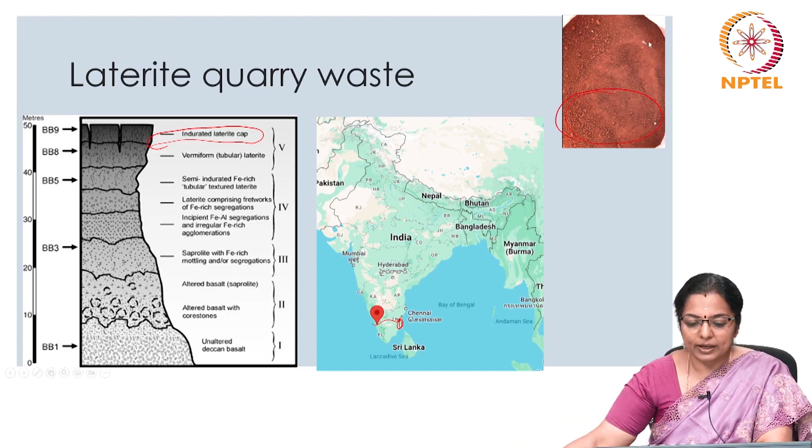If you look at the composition, laterite is naturally occurring and it is a reddish clayey material. It forms the topsoil, as we had seen in the previous slide, and it is also a subsoil in tropical regions. Now, this has been used widely as a building material, especially in vernacular architecture. It has taken various forms such as adobe bricks, and the soil has been used in traditional rammed walls and integrated techniques like wattle and daub houses, all of which we have seen in the previous few classes.

So, laterites from different locations behave differently because of variations in their sources, and therefore laterite found in Kerala will not be similar to that found in Tamil Nadu and vice versa. It varies even within a particular state because it is very region specific. Overall, a typical laterite has between 30 to 60% iron oxides, 20 to 40% aluminum oxides, and 5 to 20% silica. Hydroxides constitute 5 to 15%, and clay minerals form 5 to 15%.

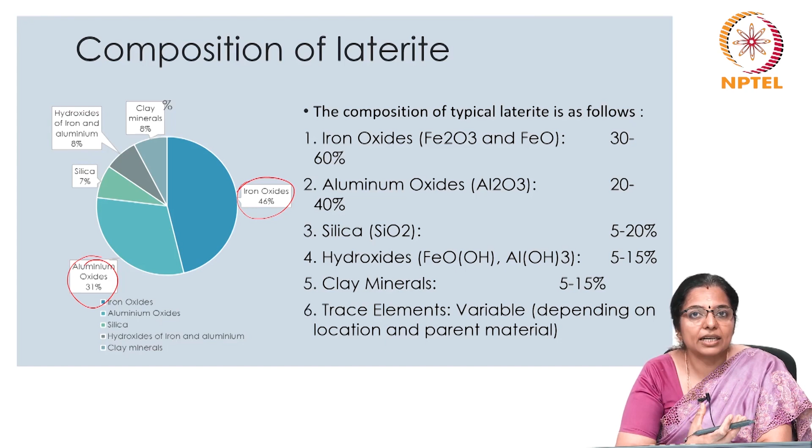There are certain trace elements. Now, the range of these oxides is very vast, and that is why laterite comes in different compositions, but the overall family is called the laterite family. So, depending on the composition of these various oxides, the quality of the laterite and its color would also vary. You have extremely reddish brown laterite, as well as dull colored laterite available.

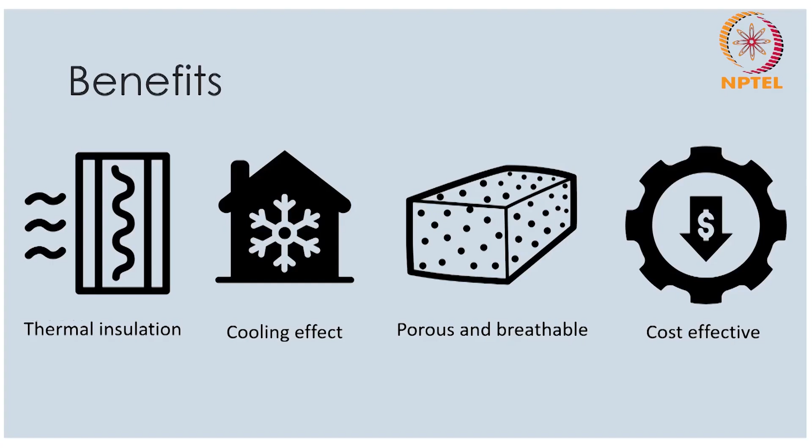Now, laterite blocks have certain benefits. It is a good thermal insulator, and it can easily adapt to different weather conditions. If you look at laterite as a block, laterite stone has very good thermal mass. Because of its thermal mass, it keeps the indoors very cool when the outside is very

hot. So, it is an ideal material for hot and dry regions, for arid climates, because the vice versa also happens. When the outside is very cold, the inside is very warm, and both happen because of its high thermal mass. So, laterite blocks have high thermal mass, because of which they keep the indoors comfortable in all extreme weather conditions.

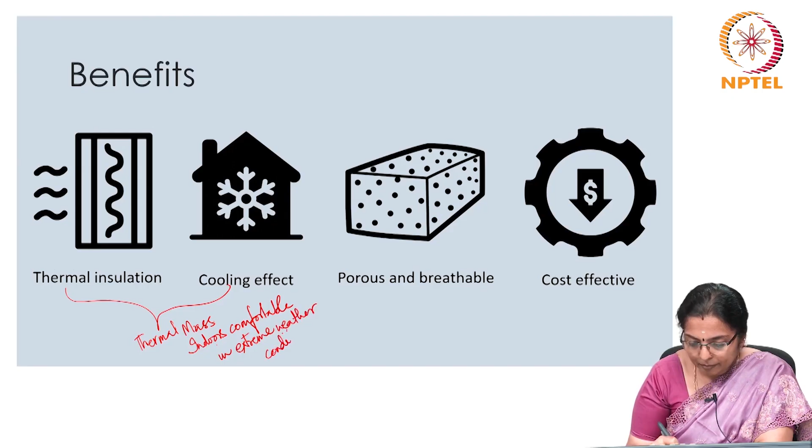That said, the laterite soil is coarse or rough, and it allows water and air to pass through it. That is, it has good porous properties, and it does not swell with water or anything like that. So, that is also a very important property, that it is porous and breathable, and therefore one should be very careful when they decide on the kind of mortar to be used.

If there is a possibility of water seeping in through the laterite soil, then it is best to have mortar or binders which are breathable, which are porous, which will allow the block to breathe. Only then the block will also dry itself automatically. If that is not done, then suppose there is a wall like this, external wall, and there is water seepage happening like this. Now, if you put a layer of cement or something like this to block the water, what will happen? The moisture will get retained here. You might as well facilitate this water to be absorbed, and it will also dry automatically.

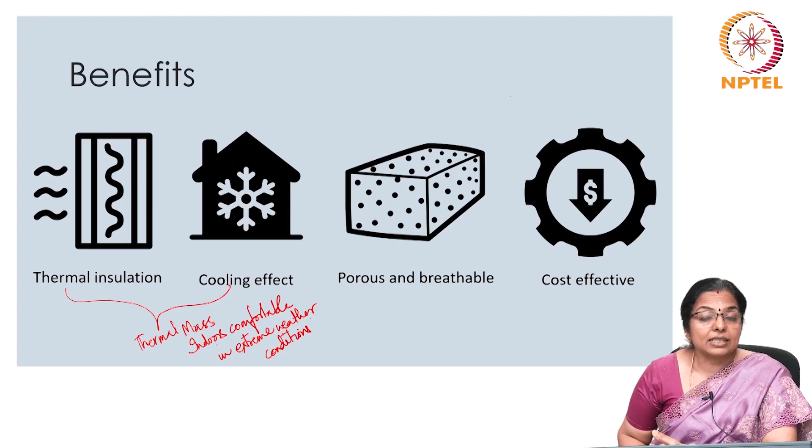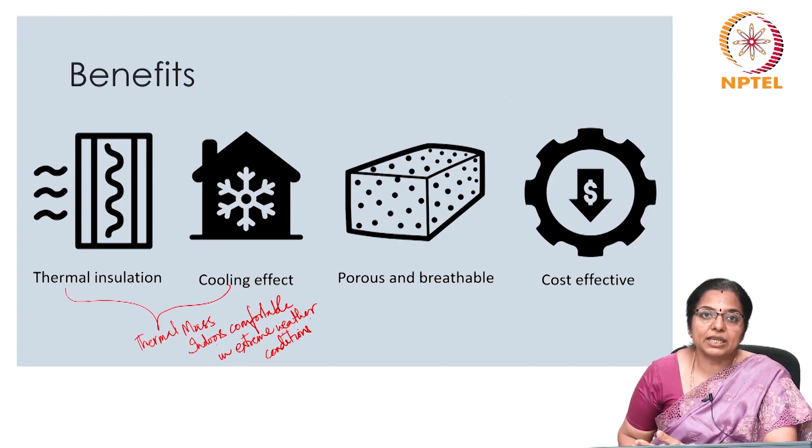Now, laterite is a very locally available material. When it is looked at as a locally available material, laterite can be very cost effective, if it is sourced locally. Otherwise, it can get very expensive, because laterite is a heavy material, especially if you are looking at laterite slabs. The slabs are extremely heavy; not only transportation cost, but the embodied energy of the block by virtue of transportation energy can rise very high.

Now, it is also found that a blend of laterite and quarry dust mix can be used to replace river sand, and the maximum compressive strength of say 1.67 newtons per millimeter square was observed in a 30:70 mix ratio of dust to laterite. So, when you use 70% laterite soil plus 30% quarry dust, it is found that this can be a replacement for river sand, and that makes it a very significant material considering the fact that river sand is in scarcity.

Also, by virtue of this replacement, the demand for natural river sand can be reduced, and this can help preserve the natural resources and reduce the environmental impact of sand mining. As you know, sand mining is a very rampant procedure, and it can lead to a lot of environmental degradation.

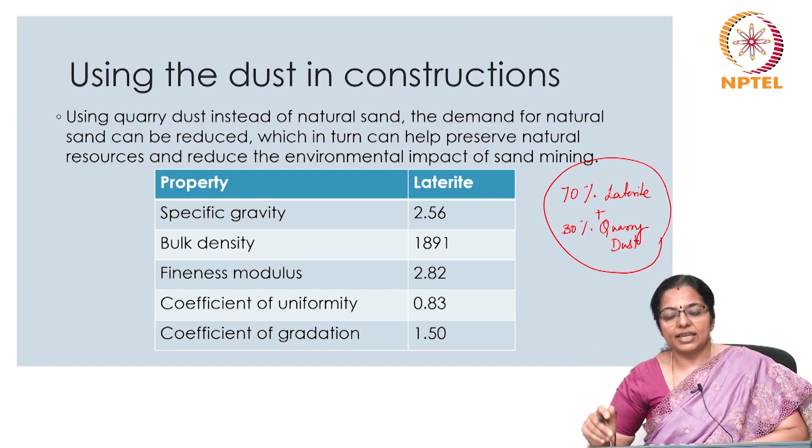Now, let us look at the applications of laterite soil as well as blocks. Laterite blocks can be cut into any sizes that you want. So, any size variation of the block is available, and large chunks of laterite stone can be fine cut to custom sizes. So, laterite blocks are used, and laterite soil can also be used. Laterite soil is primarily used in two areas. One is as a replacement for sand with a combination of quarry dust, and it is also used for plastering. When you use it for plastering, the building itself gets a reddish hue.

We will just see an application of laterite soil. In the Madhouse project, as it is called, laterite was experimented with, transitioning from simple renders to a Tyrolean technique. So, instead of using it only as a render or as a plaster, a specific technique was used with laterite. Before I proceed, you can see the color variation that is got by using laterite in various proportions.

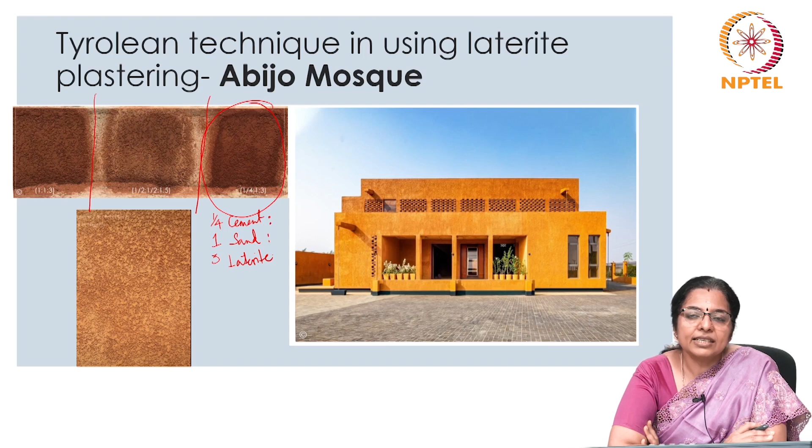Now, building on these successes, laterite found its application in many projects, and it served purposes ranging from keeping the indoors cool, or I would say comfortable, because the indoors would be cool during the warm season and warm during the cool season. That was one. The second one was aesthetics. And reduced energy consumption, reduced depletion of natural resources,

reduced embodied energy and embodied carbon, reduced operational carbon because of low dependence on electricity from the grid, because using laterite itself made the indoors comfortable.

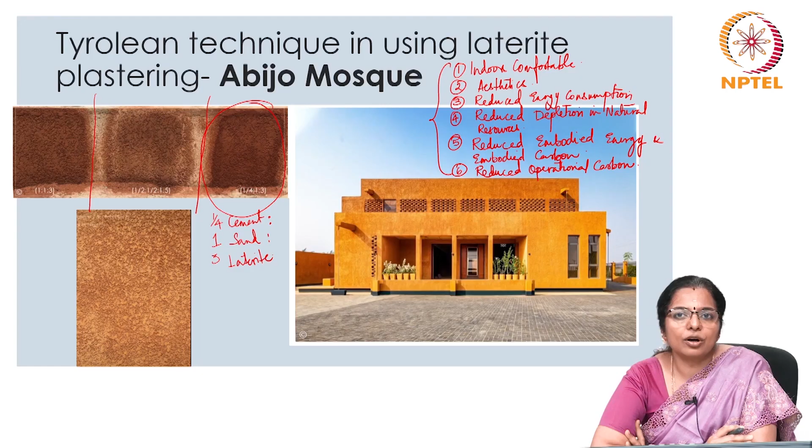So, this PVA, apart from aesthetics, when you add it, the strength of the finish also becomes better. This laterite finish improved the thermal performance of the building, and it resulted in all the subsequent things which I have listed here. So, based on this success, laterite found application in many projects, serving purposes ranging from insulation to the development of a laterite paint, and it enhanced the surface receptive to Tyrolean finishes. So, finally, laterite could potentially be a versatile and locally relevant construction material, and it made noteworthy contributions to both aesthetics and functionality.

This is the Abijo Mosque, and the aesthetics of the mosque is based on the notion that the materiality had to be sustainable, locally sourced, so that frequent intervention by virtue of maintenance of the building was reduced considerably. So, bringing a material from far away was not considered relevant, and therefore, for this building laterite seemed to be a good option because it was locally available.

And in order to strengthen laterite as a finish material, the Tyrolean method was followed. So, a textured skin consisting of laterite, sand and cement mixture was used to coat the external face of the envelope of the mosque, and this is how it happened. You can see how the plastering has happened, resulting in a reddish color mosque. The mosque per se was a rectangular structure, but then the finish was made of red color laterite plaster.

Now, the objective was to avoid the usage of air conditioning in order to cool the building. The mosque is located in a very hot place, so it was very important to ensure that the indoors remain cool by virtue of its architecture, because use of air conditioning was to be avoided.

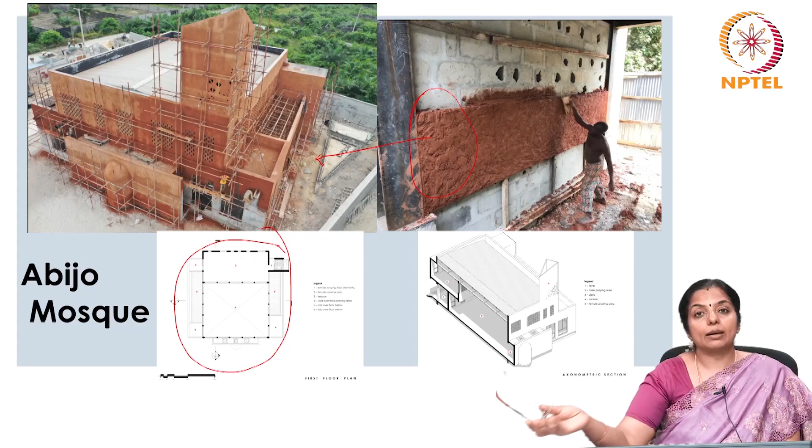Now, if you look at what vernacular and traditional building materials do, for example, we have seen mud, bamboo, laterite soil, reed, straw. One thing is certain, all these materials were got from locally available sources. That is one. Second is, all these materials have been handled with traditional wisdom, and therefore it is very important for us to document and learn the traditional wisdom with which these materials were used in buildings.

All these materials are very, very low carbon materials, which means these materials will not accelerate or cause any damage to the greenhouse gas. And also these materials will propel our agenda to go carbon neutral, because by 2070 we have given a word that we would go carbon neutral, we will be a zero carbon emitting country. So, if we have to do any of that, it becomes very important for us to choose building materials that are locally available, building materials that are net carbon zero or carbon neutral.